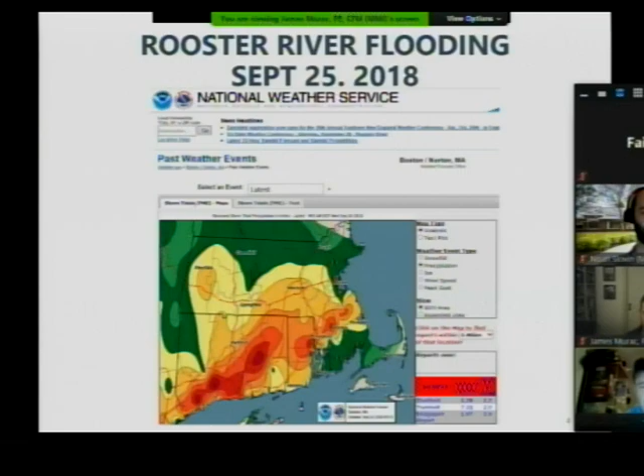This picture here shows that even when pipes or culverts are designed for the larger storms, debris from residential yards, streets, woods, and commercial areas can clog these structures and cause additional flooding.

The townwide flooding was in excess of 100-year events. Here's a sample list, not limited to these neighborhoods. The flooding reported in these neighborhoods ranged from yard, basement, garage, and even first floor flooding due to the storm that occurred for all the residential properties in the area.

Going along the timeline, this is just a quick recap, just to let people know that even though we haven't had a meeting in quite a while, the project has not been stagnant. It's been moving along. Just a little recap here: we had our first public meeting with the neighborhoods of Bennett, Bond, and Lilalyn. The second meeting we had was with the Lynbrook group. We had a Board of Selectmen presentation

soliciting design funds. On January 17th, two things actually happened. One is we contracted Milone and MacBroom to perform a feasibility study for the detention, just to see if any of the 7 sites we had picked had any feasibility or any potential for detention areas.

We also, that same day, held the Rooster River workshop at the Board of Education there at 501 Kings Highway, where over 100 people attended. You may recall that one.

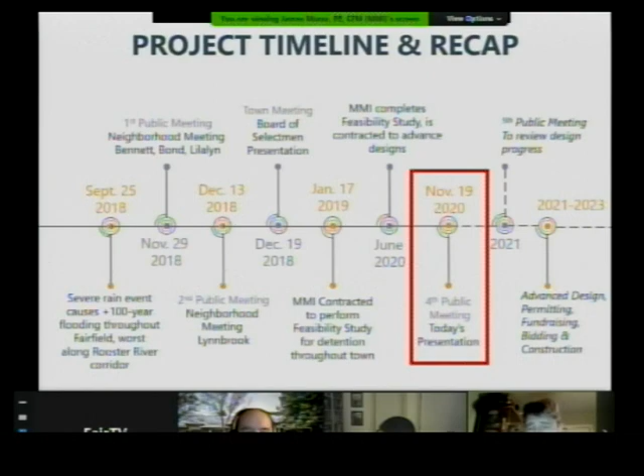So we're going to try to fast track that as soon as we can, but also realize it depends on the project, and we don't have to do them all at once. So even though we have a 2 or 3 year window, certainly the smaller projects or ones that don't impact the wetlands as much, obviously we could get done sooner than others. So with that, Jim, take it away. Thank you.

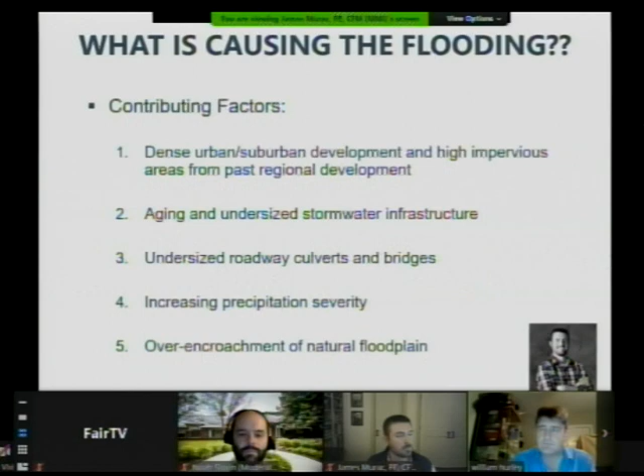Great. Thanks, Bill. You guys hear me okay? Thumbs up? All right, good.

So my name is Jim Murac. I'm a professional engineer and a certified floodplain manager and a senior engineer in the Water Resources Group of Milone and MacBroom. I've been involved with this project since about last year, since early to mid 2019, and was approached by the town to get involved in looking at how we could address flooding in the Rooster River watershed.

Our contract was pretty specific in that we were looking at detention throughout the Rooster River watershed area. But for a lot of you out there who maybe don't know how we arrived at that conclusion, I wanted to give a little bit of background of why the watershed's flooding and why detention makes the most sense at this stage. So I'm just going to flip through these slides and give a quick breakdown of where this water is coming from and ways we would typically be able to deal with it.

The Rooster River is a very urban watershed. It's been historically developed quite densely since even the 50s and 60s. So there's a lot of impervious surfaces. There's roofs, parking lots, roads, and driveways, which don't infiltrate water into the ground the same way that woods and leaves and grass do.

Back before there was development here, rainwater that would fall on a wooded area would infiltrate into the ground, and it would slowly make its way to a brook, which would make its way to a river, which would take hours or days. Now with driveways and roofs and roadways, that same water is hitting the pavement, running off immediately, and arriving in these brooks in minutes. These brooks were never large enough to handle that amount of water that quickly. So development in high impervious area is one huge factor in causing flooding.

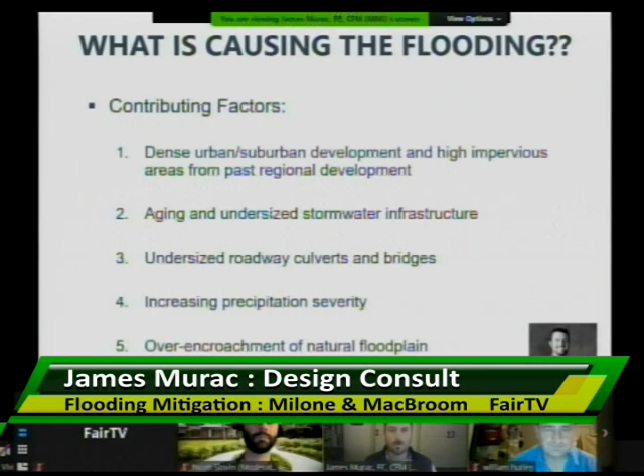And the last one, and the most important one to tonight's discussion, is the over-encroachment of floodplains. Rather than talk about it, I have this slide that can animate a little and show the progression of how a natural floodplain is typically developed in an urban area. In the top left, you'll see a normal floodplain in the middle of the Catskills in the untouched woods area with vegetation on both sides.

You have a wide floodplain bench that's very connected to the river channel itself, and any time the water rises ever so slightly up to its banks, it goes out on this wide flat floodplain with all this vegetation and loses all of that energy. It's very spread out; all of the energy is wasted on that floodplain. When you start filling in that floodplain and building in that floodplain, you're now concentrating that water and that energy into deeper, faster channels.

It's just the same as when you sit down in a full bathtub and your body displaces that water. Now you're displacing that water, which causes the water surface to rise. If you continue with that trend, it just becomes more extreme. As you start building walls on the sides, you're displacing more and more water that used to go and spread out.

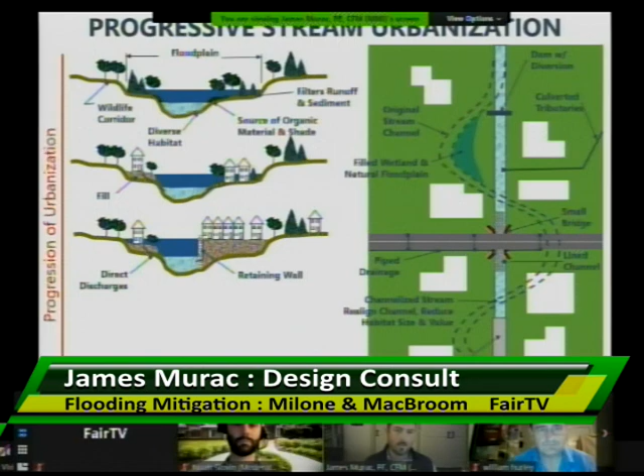And then this one illustrates channelizing with a concrete liner on the channel. This doesn't happen all the time, but in the 1950s, the Army Corps loved putting rivers in concrete channels. It's just one more worsening. And then finally, putting it into a culvert, burying it underground completely, is the final step.

And you can see at each step, the same house that maybe didn't flood in the beginning starts to flood a little, then floods more, and more houses are flooding, and finally, all the houses are flooding because you've displaced so much of the natural floodplain. There's simply no more areas for the water to go.

So flipping through those causes that I addressed and the reasons that we're here tonight, how do we address flooding? Well, we look at each one of those causes and we try to address it.

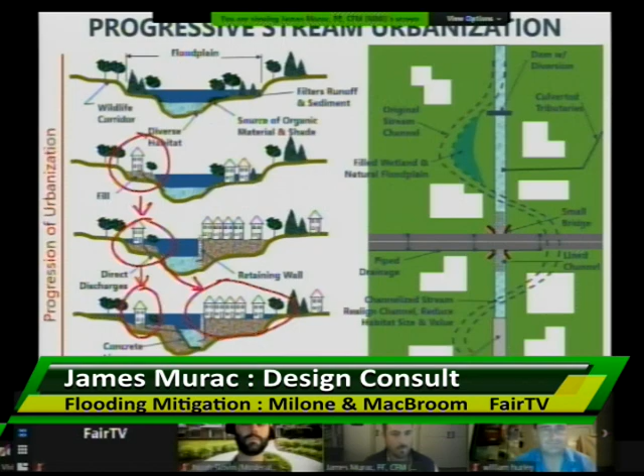So you can address urban and suburban development, but primarily you do that through regulation, through planning and zoning, wetlands, and other regulatory bodies that will have an impact in the future, but aren't necessarily going to change anything today.

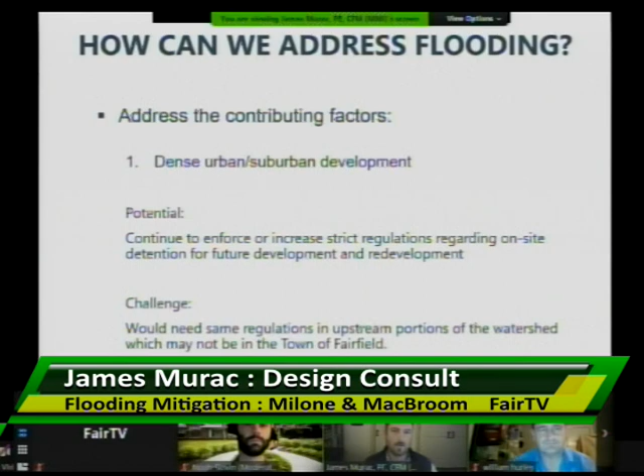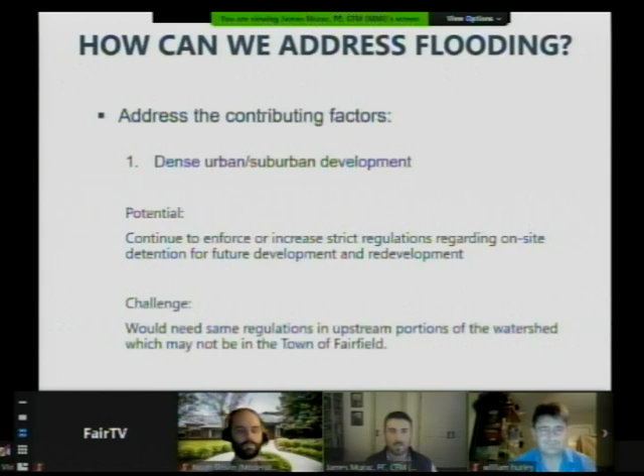And the other challenge with that I should mention too, is a lot of the water that comes from out of town, from communities from the north, you would need to have support from those communities as well, because water doesn't respect municipal boundaries. So if there are communities to the north that are highly developed and they're sending a lot of water downstream, that has to be a team effort with everyone involved.

Aging and undersized stormwater infrastructure, this should absolutely be something that every community is addressing and has on their radar, and that involves going through and having an inventory of their infrastructure townwide and understanding where things need to be fixed, the same way you would do road paving and say, this particular area is up for reinvestment, and then you have a cycle, and your public works department would just continue to do that, as I'm sure that they do. Again, this is something that's not going to fix things today, but it can incrementally fix things.

The other thing to consider with this is that as you have an inundated river such as the Rooster River, where flooding is so rampant, if you start incrementally fixing flooding problems way up in the upper portions of the watershed, you could be making it worse for those downstream. There's a finite amount of volume of water, and if it's not flooding one area, it's potentially flooding somewhere else.

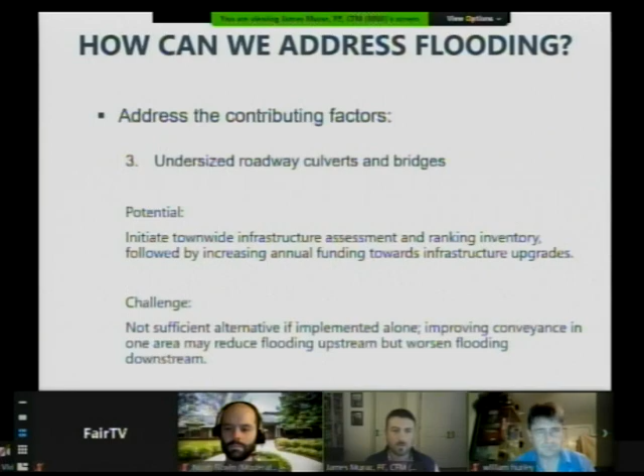So the same thing applies for undersized roadways, bridges, and culverts. Increasing the size of these will make them less prone to debris blockages, like the image that Bill showed you earlier, but it also could worsen things downstream.

Increasing precipitation severity, we can't really do too much about. The thing that we can do about it, as I started to mention, was that engineering practice is starting to catch up. Back when I started my career in 2005, Connecticut DOT was still designing things based on precipitation data that was captured from 1942 to like the 1980s. So that was historic data, and as we know, things have been changing.

The engineering practice has evolved since then, thankfully, and we are actually now looking at future projections and trying to look at the vast wealth of data that we have and extrapolating where that data is leading us. So if you design a bridge that has a 100-year service life, we're now designing things to accommodate what's going to happen in 100 years, not for what was happening 100 years ago.

And the fifth and the final contributing factor, which is why we're here, is the encroachment of the floodplain. So a lot of urban communities have this problem. It's all throughout New England and old post-industrial mill towns. Many of these rivers were encroached on. But that also leads to the lack of available real estate to reclaim any of these floodplain areas. So instead of being able to reclaim floodplain areas, we're looking at detention, which serves a very similar purpose.

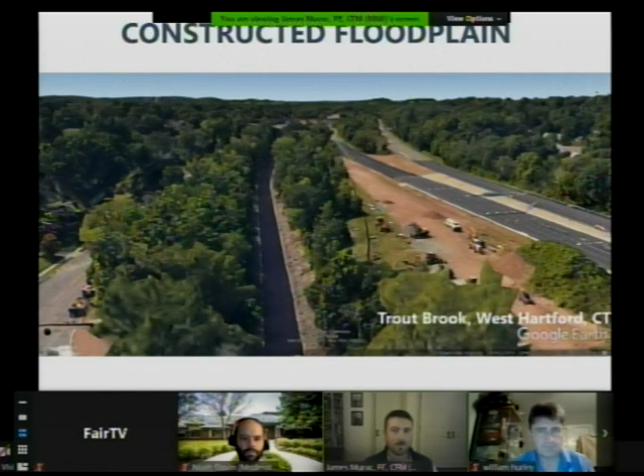So I just wanted to run through a couple quick examples to illustrate what I'm talking about. This is West Hartford. This is Trout Brook. It goes right through the center of downtown West Hartford. And this is one of those concrete lined channels I was talking about that the Army Corps loved to do right after the flood of 1955 all throughout the state.

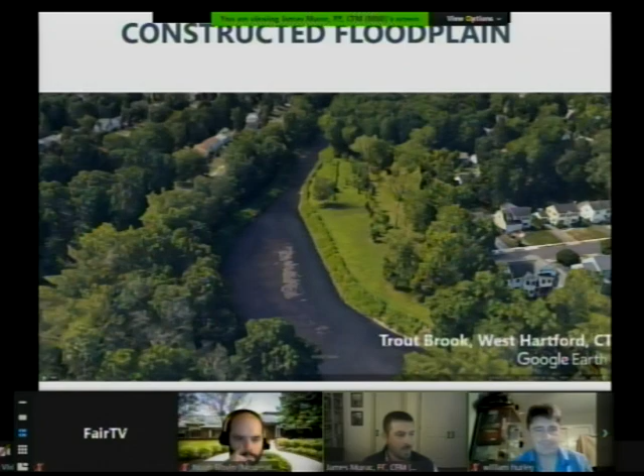But they were finding that the concrete channel was overtopping because precipitation was increasing, and they had sized it for old data. So what they did in the 80s and 90s, they hired Milone and MacBroom to look at creative solutions to fixing this, and this is what they came up with. They widened out that channel, got rid of all the concrete, and made a naturalized floodplain, right?

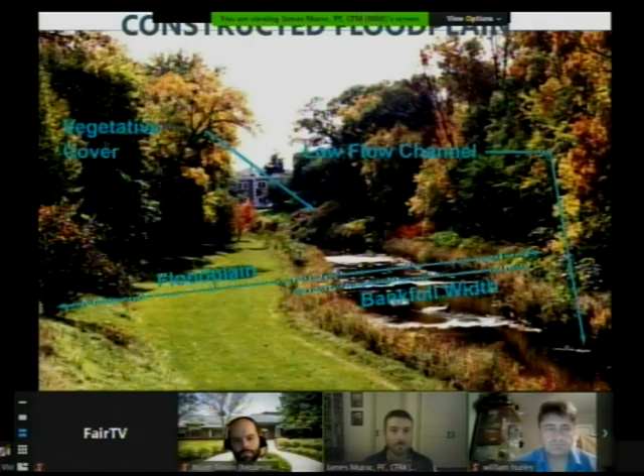So you have the bank, they call it the bankfull channel, which is sort of a sunny day stream that you see every day. But then you create that vegetated floodplain that allows for the water to expand out and harmlessly flood an area versus harmfully flooding a downtown area. It's been wildly successful. It's worked great for years. They've mitigated all of the flooding that was happening in downtown. I thought that was a relevant example because I know that there are portions of the Rooster River that look a lot like that.

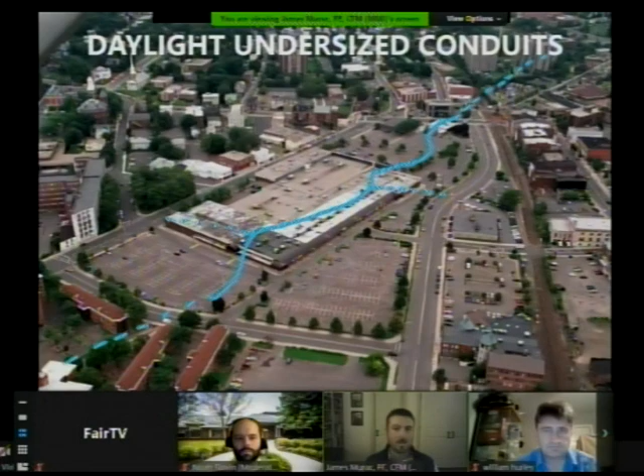The Harbor Brook, you can't see it, but it's underground along this blue line with 2 tributaries that come in, and it's a half a mile long of culverts of various sizes and shapes and configurations and ages that were just built up over time. So the city was interested in daylighting this whole area and creating a detention area and a floodplain area that could absorb some of that flood volume and help areas downstream in other portions of the city.

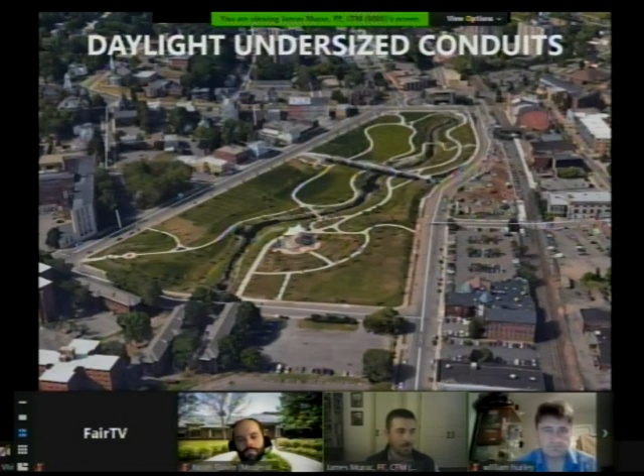So that's what we did. MMI was the lead designer on this. It was a $4.4 million project. They finished it 3 years ago. This is what it looks like today. They took the opportunity of having this flood detention area to make it into a green public space. That's a park that most of the time is fine.

Most of the time it's dry, but they put up the signs and they made it resilient to flooding, so that in the instance of a severe flood coming through, people would be notified. People could safely leave, and it would flood, and then the floodwaters would recede, and they can just continue using it a day or two later.

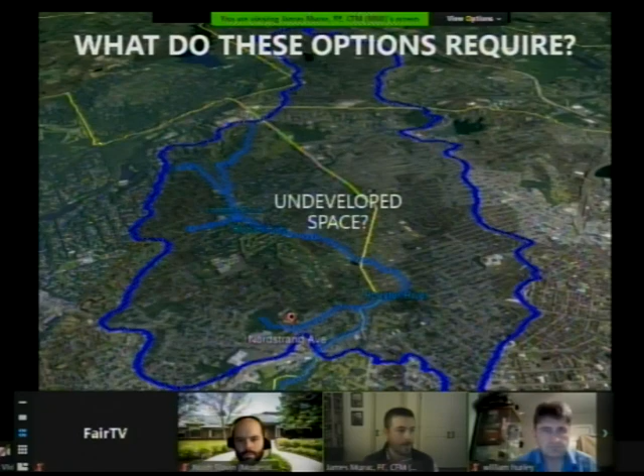I thought this was a relevant example because not only is it basically what we're talking about when we say detention, but the Rooster River Watershed has a number of areas where segments of it are below ground, and we're going to talk about some of those tonight. So those 2 options are great, but what they both require is undeveloped space. This is an image of the Rooster River Watershed, with the yellow line being the town boundary between Fairfield and Bridgeport. And you can see there's just not a lot of undeveloped space.

So that leads us to our detention feasibility study. Given the constraints of space, 7 sites were identified by the town of Fairfield for us to look at and see if detention makes sense at any of them. On the slide, I say 6 sites. One of them was found not to be something that we wanted to pursue further. The cost-benefit ratio didn't make sense on that particular site, and it did not have an impact on flooding. The other 6 we think could.

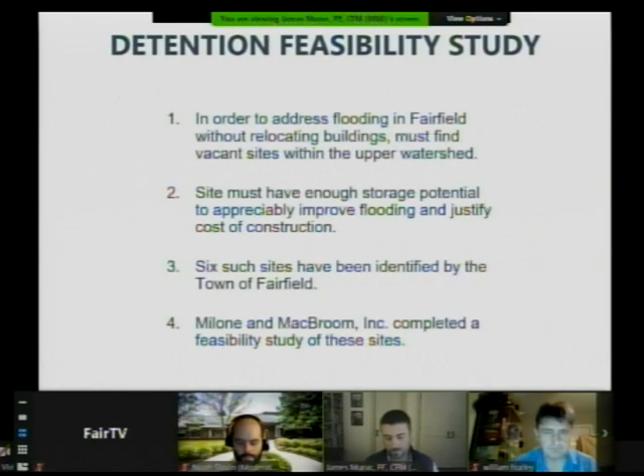So this is a quick fly video. I don't know how it's going to work over the internet. Hopefully it works for you depending on your internet speed. But this will show you where those 6 sites are located, starting at Ash Creek at Long Island Sound and going upstream.

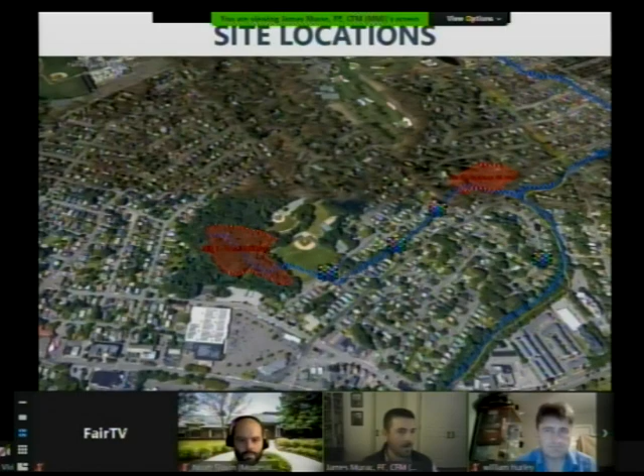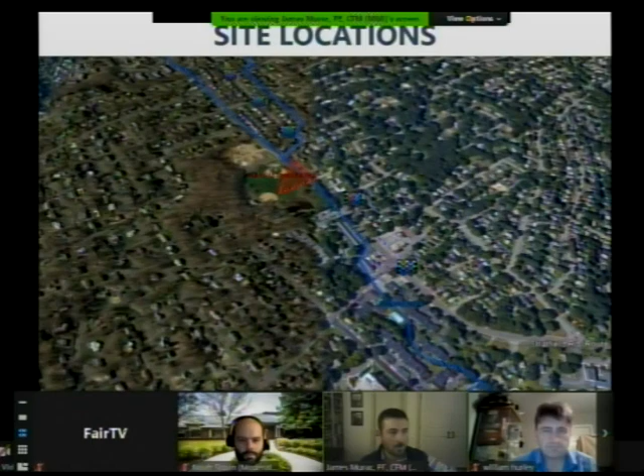Zooming around here, we see these blue waves where flooding was reported during September 25th. It's not a comprehensive list, but it's some of what we have. Site 1 is Tunxis Hill Park on the left, and Site 2 is the Algonquin Road area. They're highlighted in red. Site 3 is the Melville Playground. Going up along Stratfield Road, we see a lot of flooding that was reported. Site 4 is Lieutenant Owen Fish Park. Flooding in the Bennett Pond area. Site 5 is Woodfield Village, and Site 6 is Fairchild Wheeler Country Club.

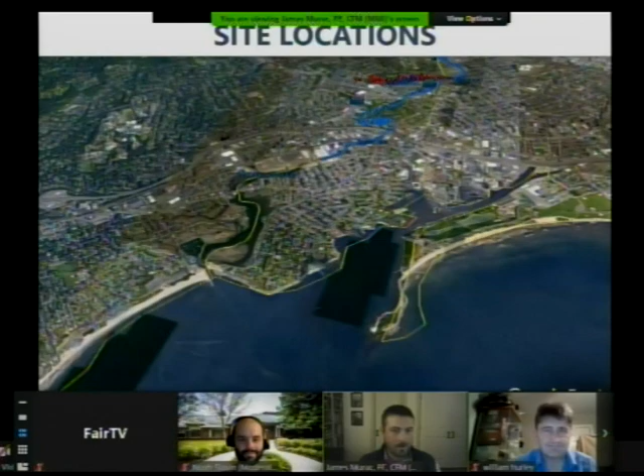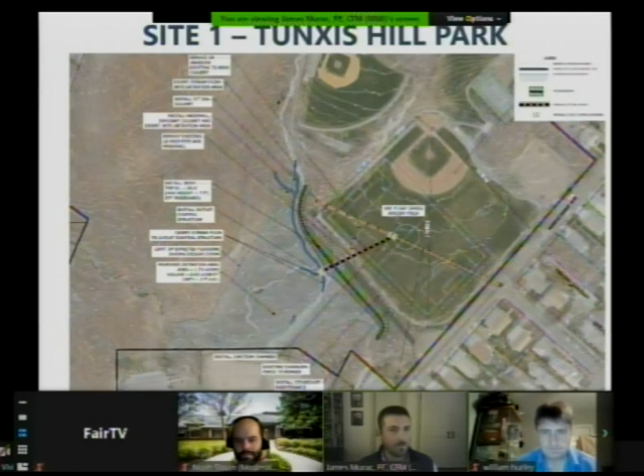Now I'm going to hand it over to Jay Williams, a landscape architect with MMI, who's going to briefly go through each of those sites and some of the elements we've developed in our concept. Thanks, Jim. Again, my name is Jason Williams. I'm a principal landscape architect with Milone and MacBroom. I want to walk through some of the elements of our concepts for the stormwater management that Jim talked about on these sites, starting with Tunxis Hill Park.

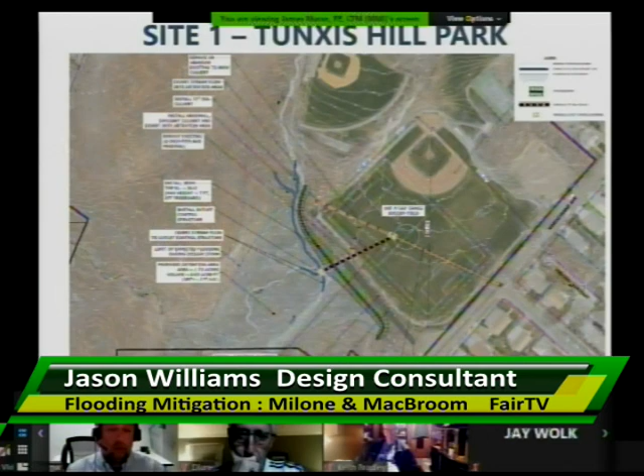We understand that there is significant flooding within the area of residential homes on Nordstrand Avenue, Villa Place, and Melville Avenue. There are 4 tributaries that head north and east through the wooded area in the lower left-hand corner. These tributaries combine in a pipe which runs on the western portion of the field, underneath the field where you can see the X's, and continues out to the roadway.

Essentially, these tributaries overwhelm the existing pipe networks, and the surcharging water backs up and overflows across the athletic fields, down Nordstrand Avenue and Villa Place, and into driveways and yards and homes along Villa Avenue until it recombines with the tributary downstream. So what's one option we can do to really limit this flooding? Well, if we could go back for one sec there.

As you can see in blue, we're reconfiguring the stream channels so they move to the south and all tie into a new outlet control structure. This is a large box that essentially takes all the storm water into it, and with a high level overflow, then discharges out underground into the center of the field into a new junction box.

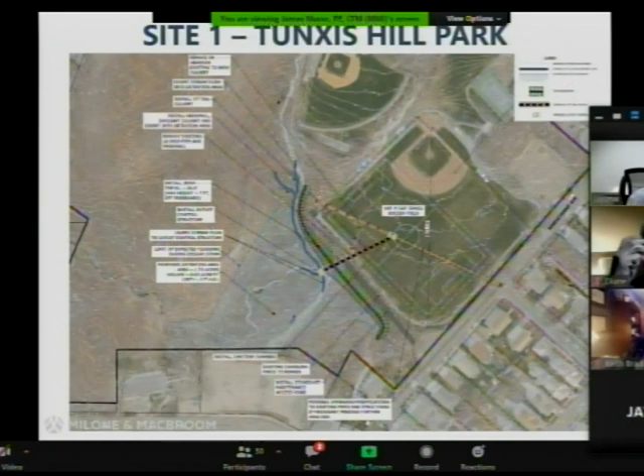But with all of the water in these tributaries coming down and flooding the field, we've got to detain it. So as you can see in green, we have a berm which runs from the northwest to the southeast and really holds back a lot of that water. In blue, you can see a proposed detention area, which is about 1.7 acres—a substantial area within the woodland that would detain the water.

Once this area is detained, it goes into the outlet control structure, into the junction chamber underground, and continues out onto Nordstrand Avenue underground in a pipe. Using the existing pipe is what we're currently showing, but further analysis may prove that we'd have to provide potential upgrades to that pipe.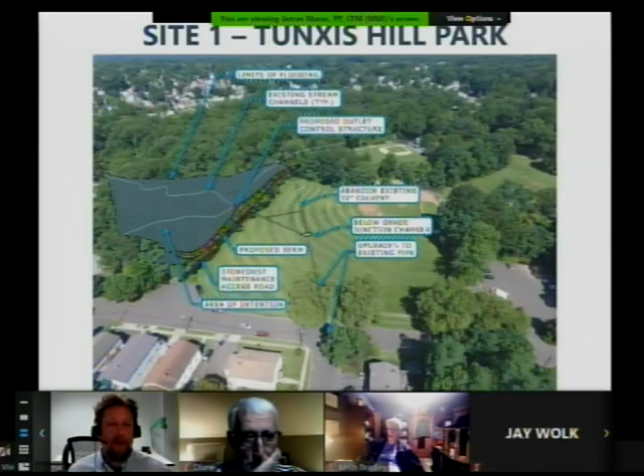In order to maintain this berm, which would be vegetated with plants and also serve a dual purpose as almost bleacher seating, we would install a stone dust maintenance access road so the area could be weed whacked. We'd limit any invasive plants growing on it, keep the existing chain link fence that identifies the limits of the athletic field, and potentially plant some nice shade trees along Nordstrom Avenue.

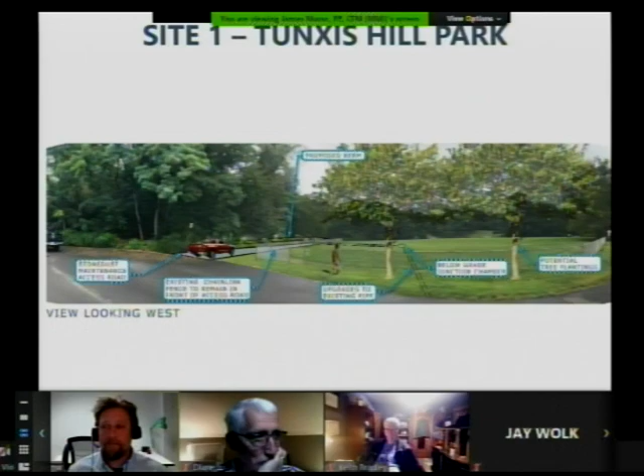So Algonquin Road is our next site. This is a privately owned parcel between Villa Avenue and Algonquin Road. This was identified as a possible candidate for the creation of a detention area, because the parcel is located just upstream of where the same tributary that flows through Tunxis Hill Park discharges into the Rooster River. The parcel is currently undeveloped and mainly forested woodland.

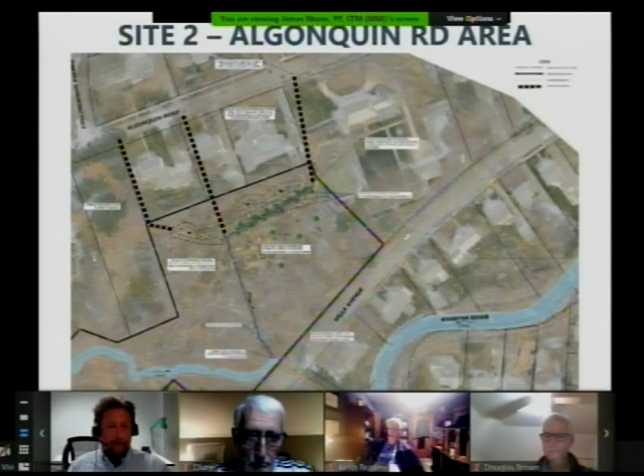Significant roadway flooding occurs along Algonquin Road, and while there are two existing catch basins—one on the right and one in the center—that take storm water underground in two existing pipes and discharge them into this open woodland area, we'd be looking at a couple of things: potentially increasing the sizing of the catch basins or pipes, and adding an additional catch basin and pipe on the left-hand side to take on some of the flooding on Algonquin Road.

Once all of the storm water goes through these pipes and enters the woodland, we'd be daylighting the pipes into open channels and creating depressional areas, as you can see with the dashed lines, to further detain some of the water. Water would continue to the south and enter the culvert under Villa Avenue and onto Rooster River.

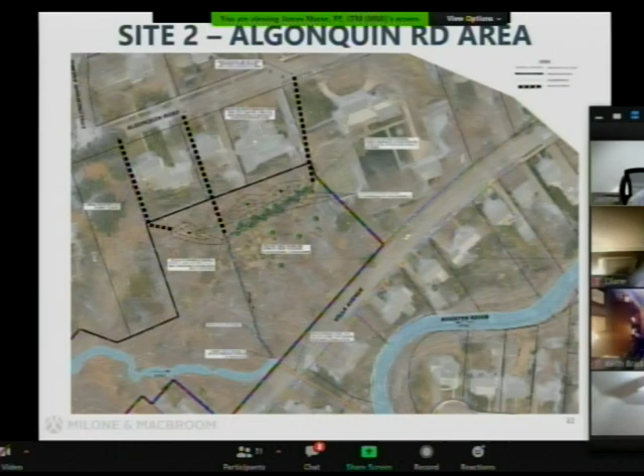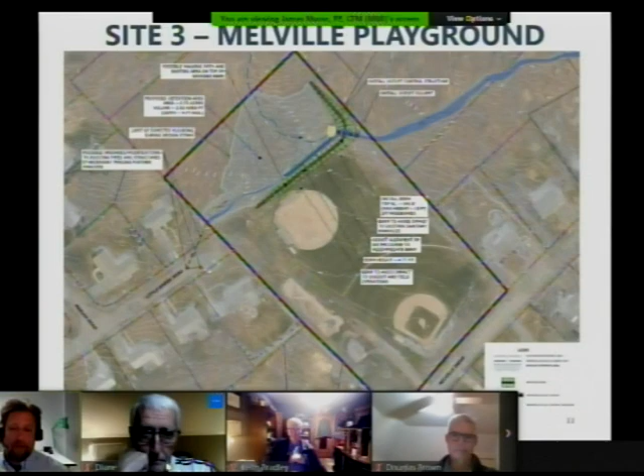Melville Playground is an important site. It's owned by the town and located along an unnamed tributary of the Rooster River. Roadway drainage from Little Brook Road, as you can see on the left, discharges just to the north of the park or the baseball fields, and the water course runs to the northeast along essentially the border of the baseball field.

In heavy rains, we've got a lot of flooding in this area, so we want to hold back the water again with the installation of a berm to detain approximately three-quarters of an acre of water, with the one main tributary heading down to the south. That all ties into an outlet control structure, as you can see in the cream color, with a pipe underneath the berm that then spills out to the northeast.

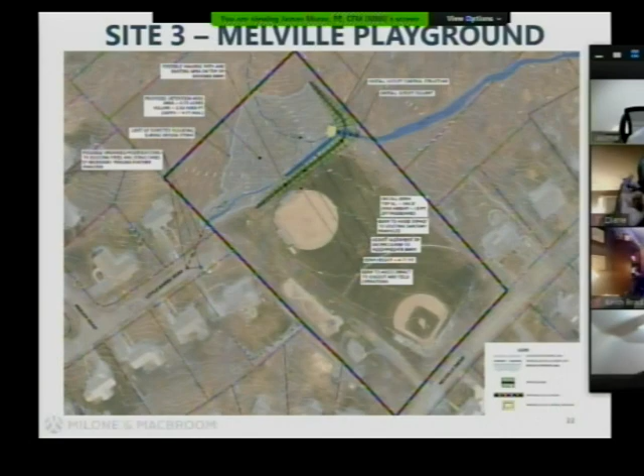Here's an aerial view looking to the northeast of Melville Playground. You can see the berm running along the edge of the baseball field, which could also double as almost bleacher seating. There could be a walkway on top of it, but the berm really helps detain all of this water in the forested wetland and control it through the outlet structure.

This perspective view, also looking to the northeast, shows what that potential berm could look like. Based on this project and the hydraulic analysis we'll be doing in the future, we wanted to show two options identifying different volumes of water we can hold back—maybe this berm wants to be 4 feet in height with seating and a walkway on top, or maybe it needs to be more in the range of 7 feet tall.

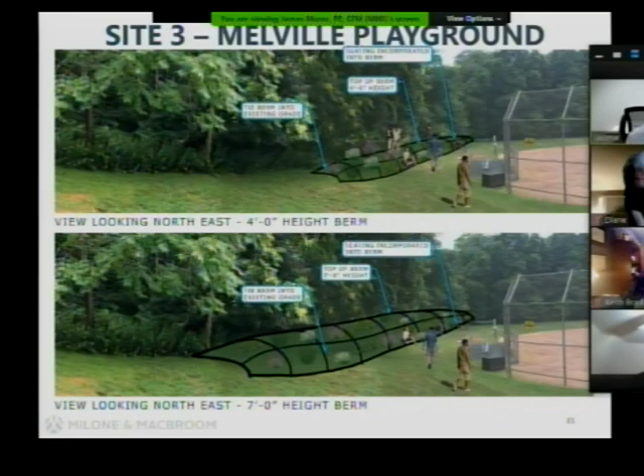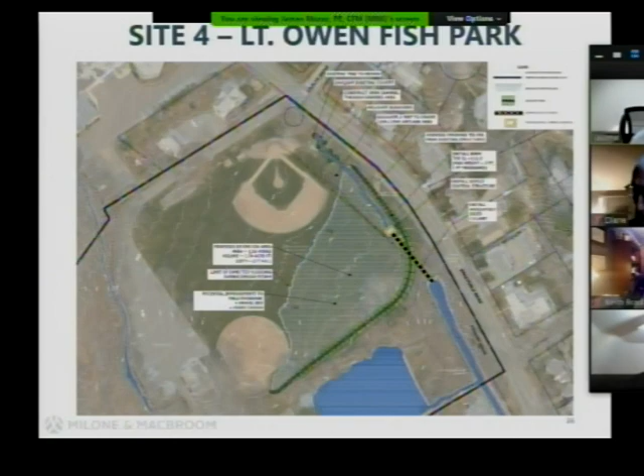Lieutenant Owen Fish Park, again owned by the town, is located on London's Brook, another tributary of Rooster River. Currently it flows beneath the larger baseball diamond at the top of the image in two 6-foot wide by 3.5-foot high pipes, so it's taking on a tremendous amount of water. This site is very important because providing detention here has the potential to decrease overall flows in the Rooster River watershed, since it's located in the upper third portion of the watershed. Lowering these flows will benefit all the properties downstream in the floodplain of London's Brook.

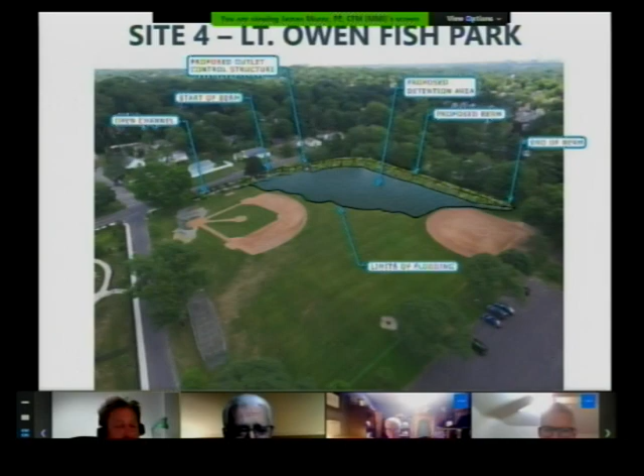As part of this project, we'd also be proposing a berm at the edges of the athletic play area, so it won't impact any play. The installation of the berm holds back and detains the water, and you can see the limit of flooding that would encompass this area. More importantly, if you can see on the left-hand side, there's a very large tree on the corner.

It's from this area that these underground pipes continue along the roadway. What we'd be proposing is to open up that channel, similar to what Jim showed in Meriden with the Meriden Green, but on a much smaller scale. If we can get the water out of these pipes and let it branch out into a micro stream with micro floodplains, herbaceous plantings, pollinator species, and boulders for kids to sit on, we're not only providing a stormwater element but also creating a placemaking element—families watching ball games, kids sitting by the streams, butterflies moving through—with this open channel moving into the lower London's Brook.

Once flooded, you can see the proposed outlet control structure, very similar to previous projects, that would then be piped in a high-level overflow through the berm and into London's Brook.

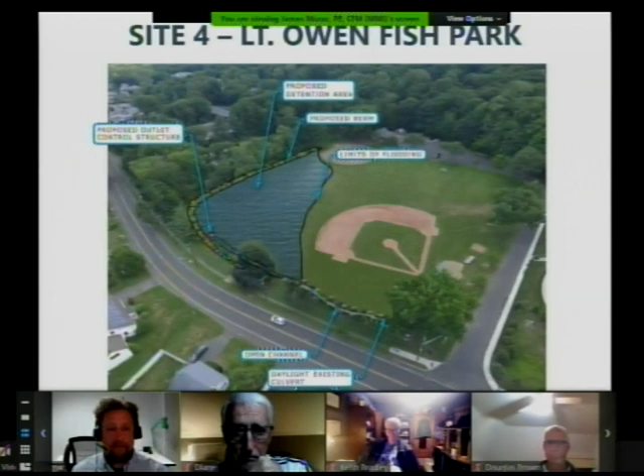Another view from the roadway looking southwest shows that daylighted existing culvert at the bottom of the page, with the open channel running along the side and the sidewalk. It's really a beautiful element, even just driving along the roadway or walking on the sidewalk, seeing how it continues down to the outlet structure and further down to London's Brook, which is also daylighted.

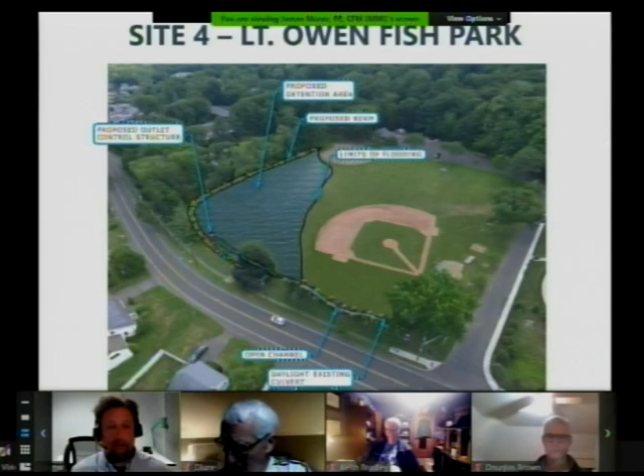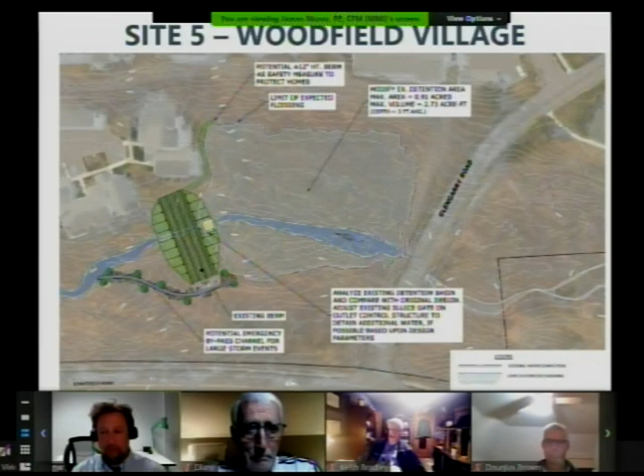Woodfield Village is our fifth site. This is a condominium development that includes a lot of detention basins throughout the site. Most of the detention basins are in forested woodlands and are controlled by 12-foot by 12-foot concrete outlet structures with sluice gates. These sluice gates are mainly left open in accordance with the original engineering design. This concept proposes to increase detention at one or more of these, based on our hydraulic analysis, involving only very slight modifications to the actual structure, shown in cream—no monumental structural changes.

As you can see in green, there's an existing earthen berm here. As part of this project, heading to the north of this berm, we would install a small 12-inch-high berm. The main reason for this is to protect that one home.

We obviously... go back.

Sorry, Jay, I didn't mean to do that. I did want to just clarify that would be a 12-inch berm. Oh, did I say 12 feet? Sorry about that. So just a small little berm to further detain the area.

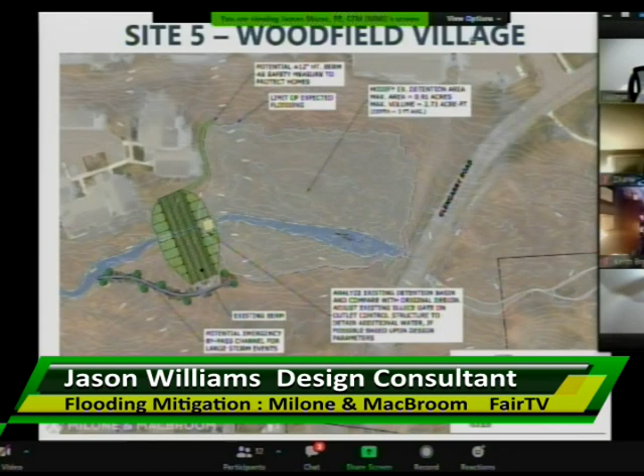You can see the area of detention, approximately 1 acre, so it's a pretty large area. On the southern side of that, we'd be installing a small emergency bypass channel, which is nothing more than a small stream with plantings around it that acts almost as a pressure release valve when the detention area fills up. We're providing an area for this water to release and continue down and tie into the brook.

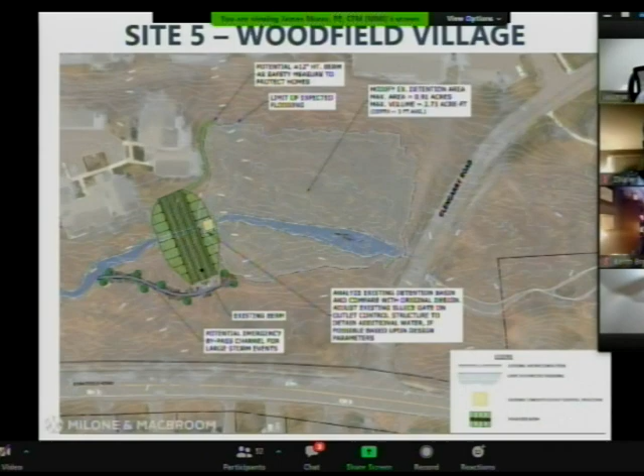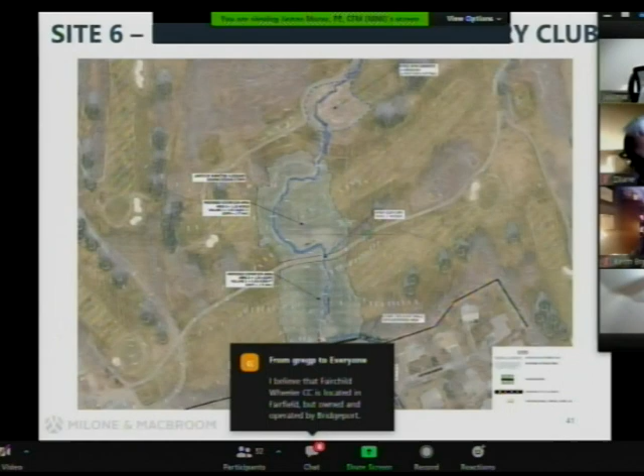Moving through the golf course is this existing stream where cart paths traverse over it. At the very top of the page is an existing, or what was once, a pond that has filled in with sediments. It's got invasive plants in it. So stage one is cleaning this out, getting all the muck out, getting rid of the invasives, and using this small area as a detention pond, but also planting it with a riparian buffer so it has some habitat value and aesthetic value as you're driving on the cart path just north of it.

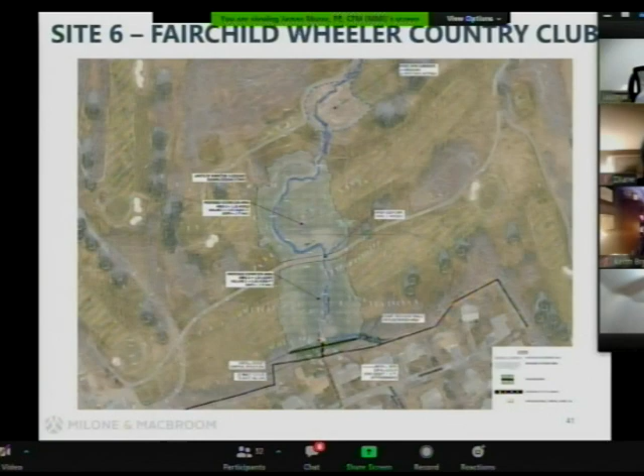With the installation of the berm, you can see we've got a significant area, almost 4 acres, and then another 3 acres, almost 7 acres of detention of the stream channel that really just ties into the existing contours within the golf course.

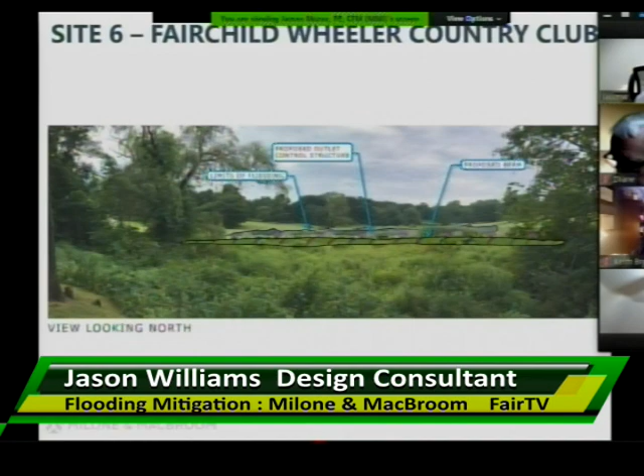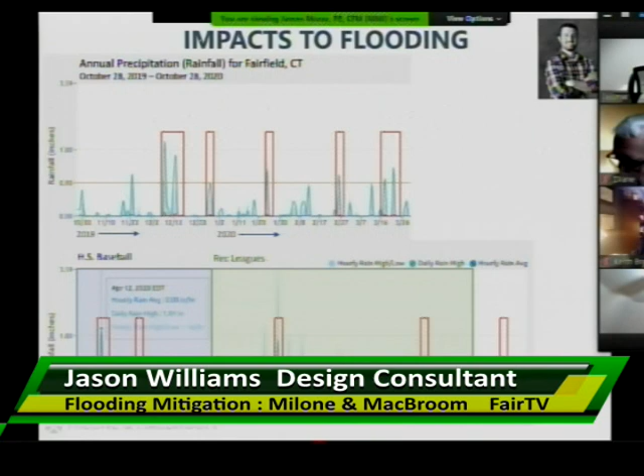Jim? All right, Jay, are you all set? I'm all set, thanks. Excellent, thank you.

That was great. So I was going to jump back in, and I have two more slides, and then I'll hand it back over to Bill to let you guys know what the next steps are here.

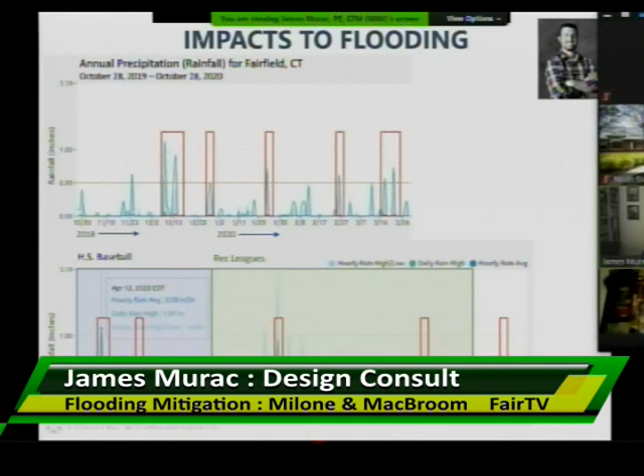So those are the projects we've come up with from a conceptual perspective. And I'm sure a lot of you are thinking, okay, what is this actually going to do for my home, my business, where I live? How much is this going to impact flooding? The answer is all of these projects have the potential to help quite a bit.

We did do a screening level analysis to determine that that's the case. But we don't have the details here at this conceptual design stage to be able to answer a lot of those detailed questions. We're here for you today to present what we've got, to get your input, and to take all that input to bring these projects to the next level.

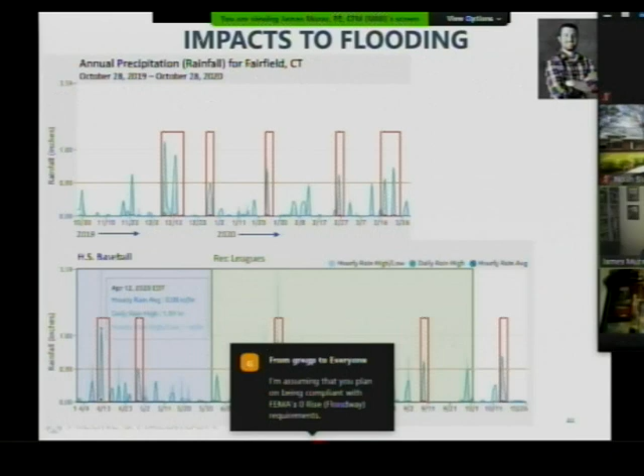Because the engineering analysis to answer the question of how much this project will help flooding at a specific address, by 9 inches or whatever, is very, very complex, and it relies on the details of that design. As you can see, the most detail that we have are these renderings and sketches, of which we have no actual engineering data.

I wanted to mention that, and I wanted to show this slide because I know another question you may have is, at Lieutenant Owen Fish Park, where we're proposing a detention system that utilizes some of the outfield, how often is that going to flood? The answer is, again, we don't know yet because we need to make that decision together. We need to have some input from the community.

Depending on how often it is made to flood based on the design, there will be more benefit downstream. So it's sort of a balancing act that needs to be weighed.

In this completely theoretical example, this is the last 365 days of rainfall in Fairfield. I drew an orange horizontal line at the 0.5-inch mark to illustrate what would happen if we designed this detention basin to flood every time we get 0.5 inches or more of rain. If that happened to be the case, this timeline—unfortunately I had to break it into two sections to fit on the slide—but starting on the left...

Starting on the left on October 30th, 2019, these red boxes indicate times where the water would have been out onto the floodplain or into the outfield of Lieutenant Owen Fish Park if this was the design. So you have 1, 2, 3, 4, 5 instances through March and another 5 through the rest of the year, so 10 instances in that year.

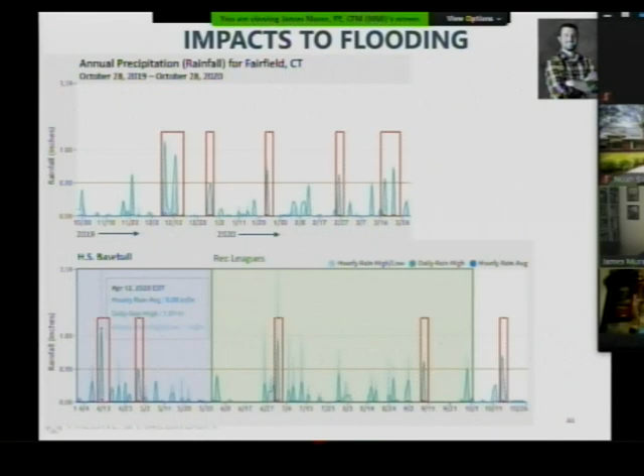I mentioned that we did a screening level analysis, just to give you a little more idea of what that means. This is the result of that analysis.

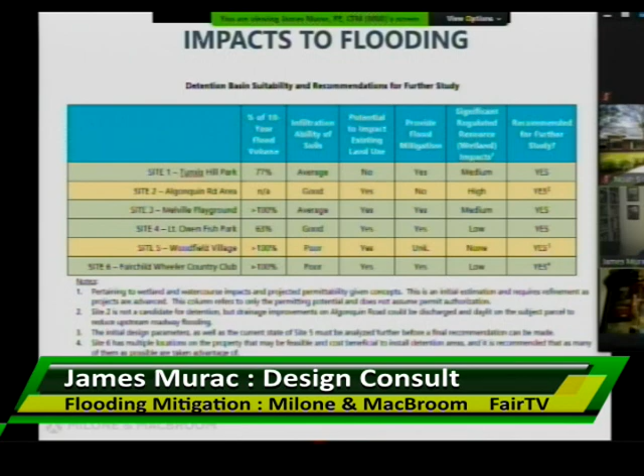We looked at the 10-year flood as a litmus: if we can detain 10% of the 10-year flood with how much volume is available on a site, then that probably will make sense financially and will have an appreciable benefit to continue looking at. If an area was too small to detain that much, then typically the cost of constructing anything there would not achieve an appreciable benefit, and that was the case at one site, as I mentioned earlier in this presentation.

We also looked at the infiltration ability, the permeability of the soils. Nice sandy soils that accept water more quickly are obviously something good. Areas with clay, muck, and a lot of silt in the ground do not infiltrate as well. So that was a consideration.

We looked at the potential land use of that site. Lieutenant Owen Fish Park is a good example where there are potential impacts that we would have to mitigate with the construction of any project there.

Again, we looked at the potential for flood mitigation, and we also looked at the regulated resource impacts—wetlands, forested wetlands, things that might pose a problem when we go to the permitting aspect of this project from Connecticut DEP or the Army Corps, who may have concerns. Those are the parameters we used to get to this level.

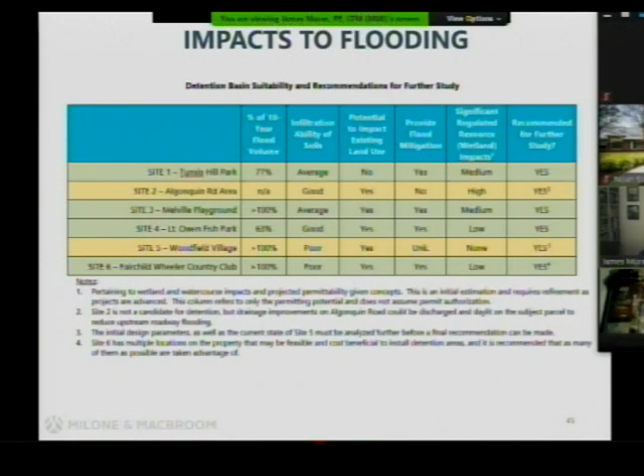So that is a summary of where we are, how we got here, what we've done to date, and the projects we've come up with as potential concept ideas for you. I'm going to hand it back over to Bill, and I think he'll give you an idea of where we're going, and then we're going to open up the floor after that. So thank you.

Thanks, Jim. Everyone can hear me, I hope?

Okay, I just wanted to mention the last two sites that were mentioned, Woodfield Village condos and the Fairchild Wheeler Golf Course. I have to again put in perspective that both of these properties are not owned by the town of Fairfield. So we would have to work with those owners, hopefully they'll see the benefits of the project, hopefully they'll receive some benefits from flooding as well, and we'll have to go forward. But I just wanted to highlight that those two areas are not owned by the town.

As further design criteria comes down and gets developed, we will certainly be working with those entities. We've done some preliminary talks—I've talked to a couple of people at the condos, but not officially. And we've been working with the city of Bridgeport a couple of times; we met at the site, and they seem to be on board, because detention at any of these spots will eventually also help people that live in the city of Bridgeport along the Rooster River as well.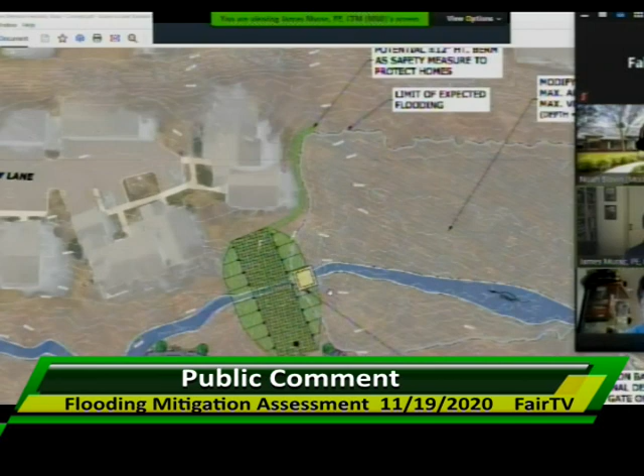So I can briefly share my screen. I've brought up the rendering for Woodfield Village again. Hopefully that works. So I was just looking at this area. I think the question was intended to ask what the slope of this berm is. If I'm misinterpreting that, feel free to add some clarification. But just measuring this slope, which was constructed when the condos were first built, it's 2-to-1, which is pretty typical of an earthen berm dam. And it's fairly steep, but it's relatively stable.

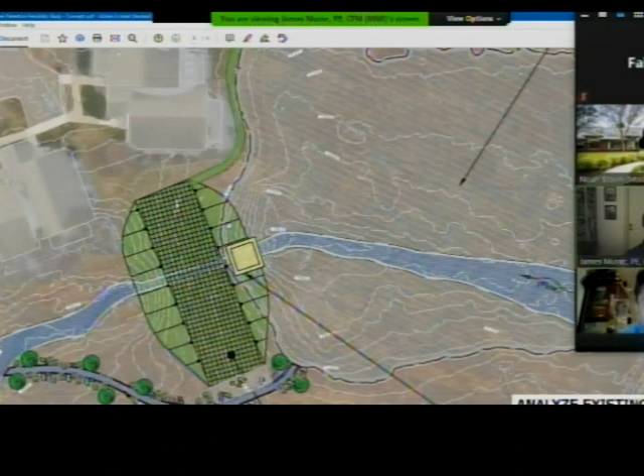I haven't been out there for a few years. I recall that it was wooded. There was a lot of debris and down wood on it. Sometimes when they design and build these, they would riprap and stone protect them, especially on the downstream side, which is where there might be more erosion if there was a flood event that would risk overtopping it.

Again, not knowing the parameters of how they designed it, there may be even riprap underneath the leaves that we're just not aware of. They may put topsoil over it. We've done that in the past too. So we really want to get our heads into that original design, and certainly any modifications that would be made would be done so with the responsible engineering analysis.

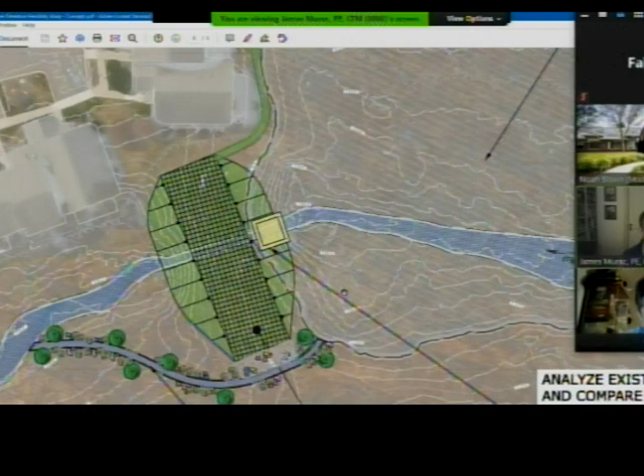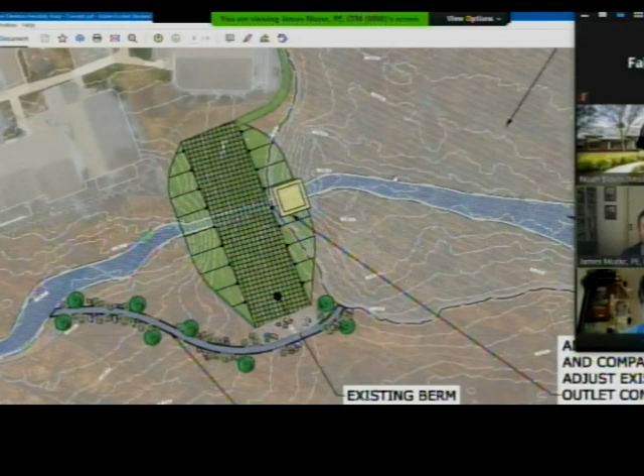It's likely that, given the size of this, if it's not a regulated dam through Connecticut DEP dam safety, then it certainly could or should be, and they have a set of very strict requirements in the alteration to an existing dam. So I wish I had more information on this one for you, but as it stands right now, we just identified it as a possibility. Of the ones we discussed here, to be frank, once we look at that analysis, we could determine that it just doesn't make sense. But it just seemed like an opportunity to at least ask the questions and see if something can be done there.

And Jim, it looks like they're 1-foot contours, reading some of the labels. Yeah. The interval is 1 foot. That's correct.

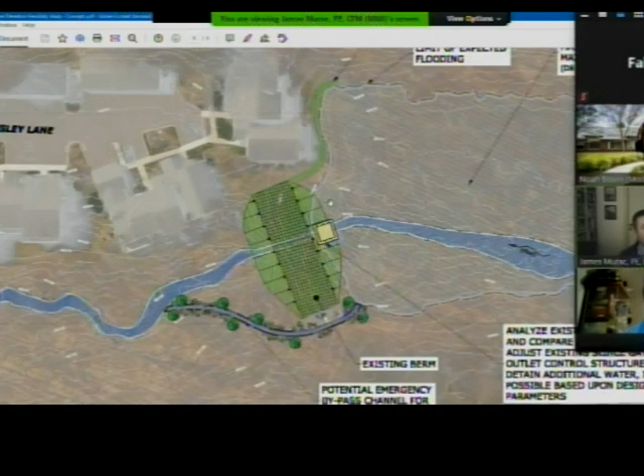All right. Well, I don't have any more questions in the chat, and I don't see any hands raised. There's a comment from Greg pointing out that projects like this are intended to reduce the frequency and intensity of flooding. You can't eliminate flooding completely, and in really intense storms, we'll still have some problems. Yeah, I agree with that statement. It's a good point, Greg.

But again, hopefully the areas that are flooded don't get flooded for as long or as deep. And in some cases, that might be enough to salvage furniture or drywall or whatever. In other cases, it still might not matter. It all depends on each individual location. But he makes a good point. And again, that's what we're all trying to do, is at least reduce the chances. And if you get flooded every 30 years versus every 3 years, I think everybody would agree that that's at least better than the latter, if you know what I mean.

I do have a hand now from Margaret, so I'm going to ask her to unmute. Okay. My question is, how deep do you expect the Woodfield area to get at the deepest? Did you get that? Yes, we heard you. Thanks, Margaret.